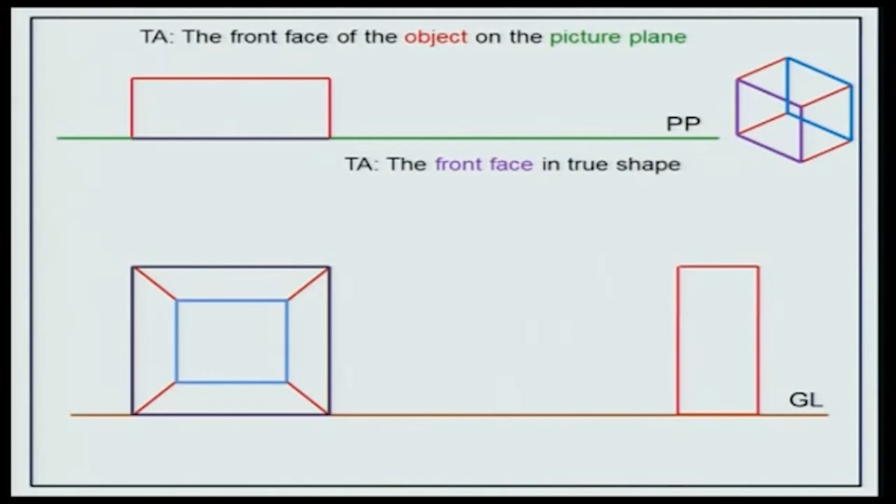This face is the back face. What do you have to say about this face? Is it going to be in true shape? Careful. Yes. Good. Is it going to be in true size? No. Good. The back face is going to be in true shape, but it's going to be scaled. Why? Because all the edges of the back face are parallel to the picture plane, but not on the picture plane. That's the reason why it's going to be in true shape, yet not in true size.

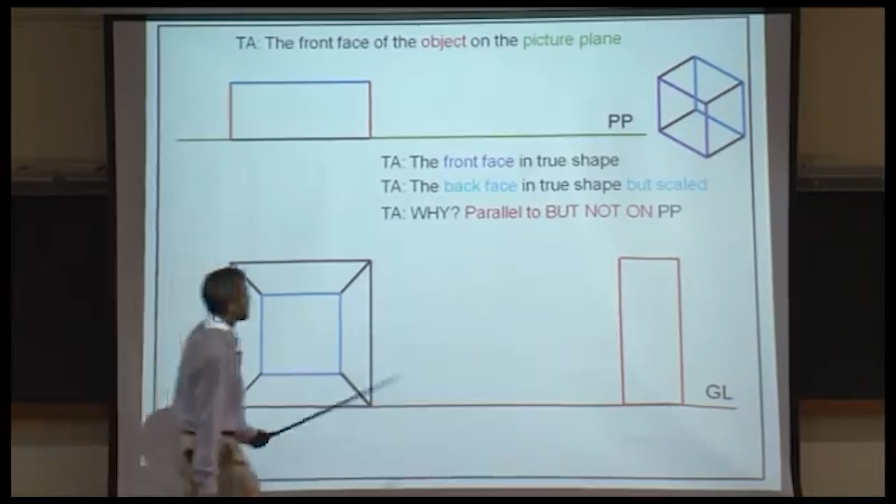This is the back face of the object. How about these edges here, the 4 ones? What do you have to say about this? Are they converging to a point? Okay. And they correspond to those depth edges of the object. Those black ones.

What do you observe about these edges? Are they on the picture plane? Are they running away from the picture plane? If they are running away from the picture plane, in perspective they're going to be showing up as a set of lines which are converging to a point. These black lines correspond to these depth edges of the object, and one observation that you make is the depth lines have to recede to a vanishing point.

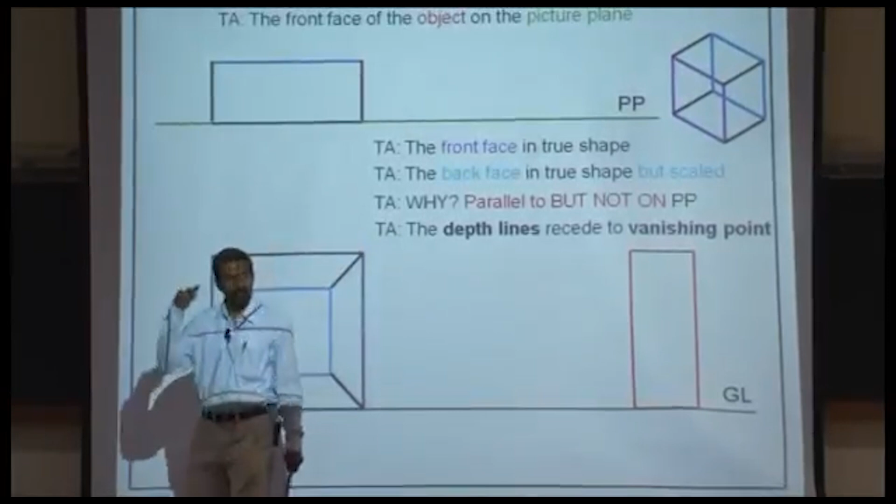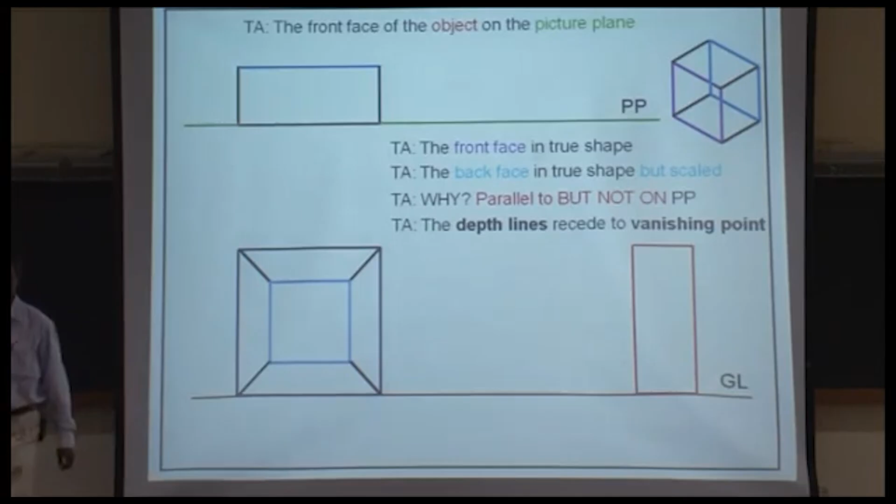So observations, let me repeat. The front face, of course, is in true shape. So anything of the object which is on the picture plane is going to be in true shape and in true size. By the way, what would this picture correspond to? Any idea? The scheme is very similar to orthographic views. You have a front view, a top view, a profile view, right? But what would this guy correspond to?

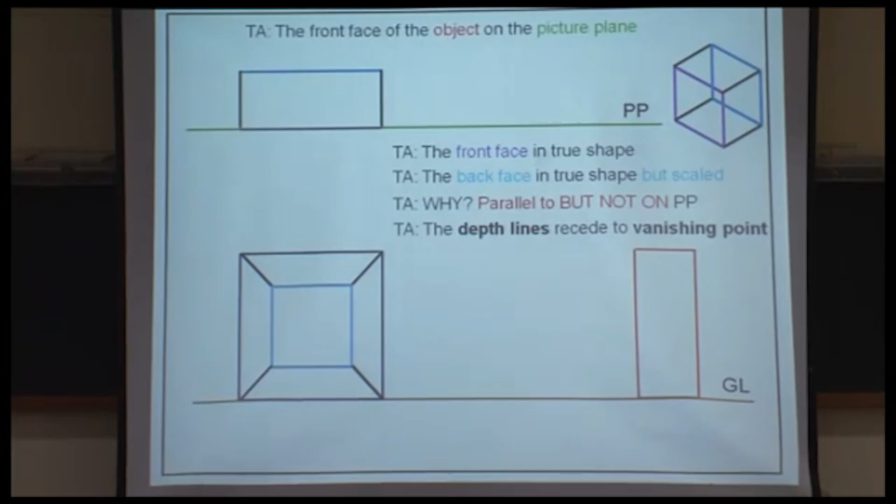This guy is going to correspond to the image of the object on the picture plane in the front view, of course. So that's the picture plane. This is the object stationed relative to the picture plane. So you'll see some image of the object, and if you rotate this thing, this is what you're going to be seeing. So keep that in mind. So of course these guys are converging to a single point. It's called the vanishing point.

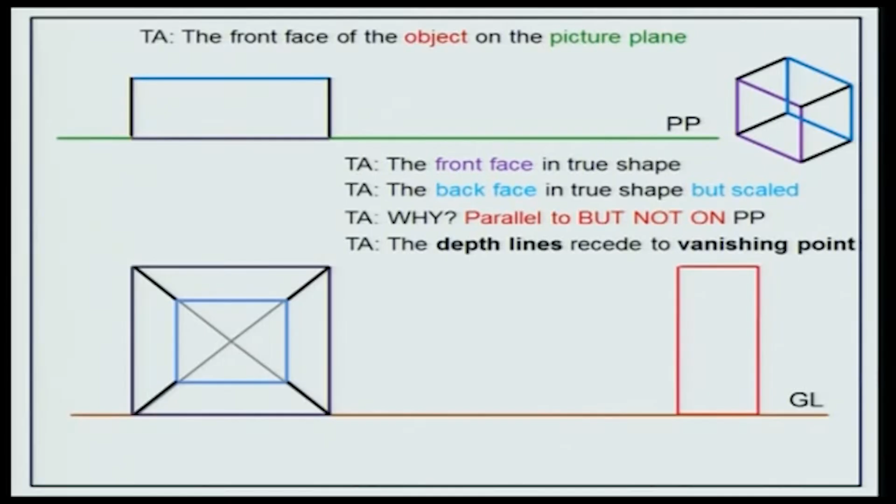And then based on these observations, we kind of frame a set of rules. So thanks to my conversation with Professor Kishore, he had dropped by my office, I guess 2 or 3 days ago, Professor Kishore, was it? 2 or 3 days ago, na? And then we had this little discussion from where I kind of summarized these rules for you.

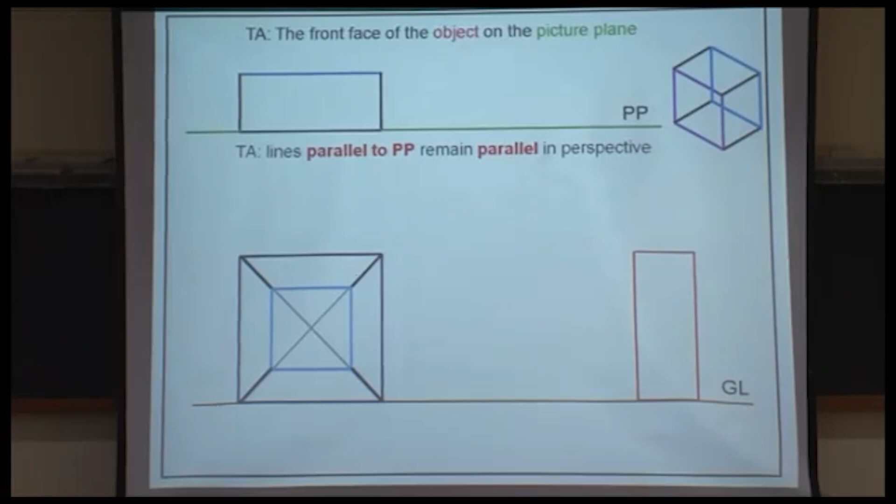Lines on the picture plane will always remain in true scale. Okay. Rule number 2. Rule number 3, any line not parallel to the picture plane has to recede to a vanishing point. Okay. All right, so these are 3 rules that you need to keep in mind. As I said, this guy here is the image of the object on the picture plane in front view. Okay.

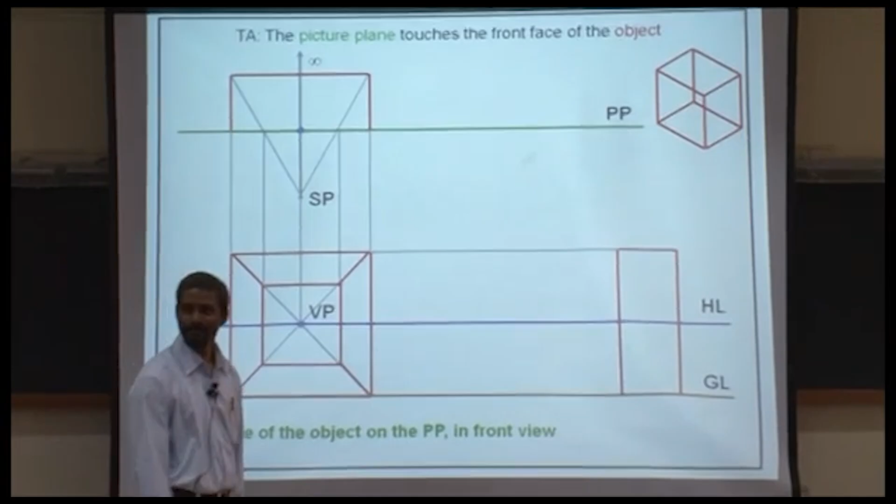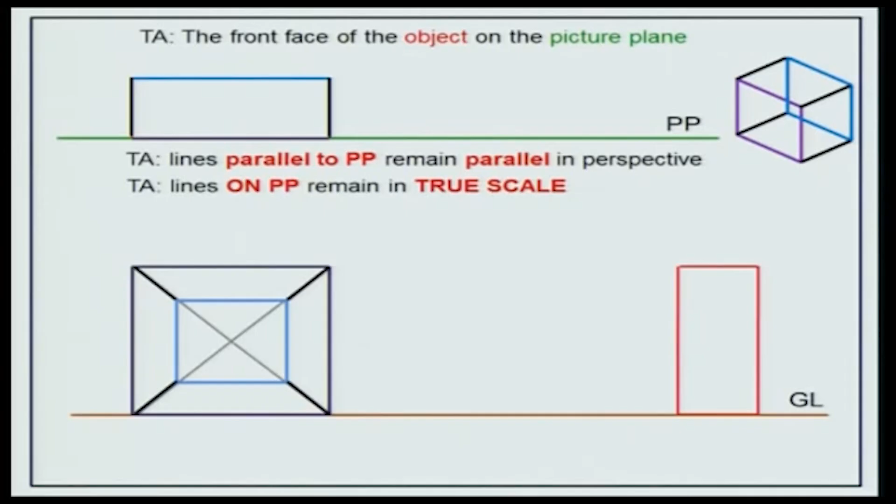Deep stuff? Yes, no? One more time, real quick. Keep these three rules in mind. Lines which are parallel to the projection plane or the picture plane, they remain parallel in perspective. Okay? Lines on picture plane, they'll remain in true scale. Any line which is not parallel to the picture plane has to vanish to a point.

Now look at the top view. How many lines do you think are not parallel to picture plane? 4. They'll all have to vanish, right? They'll all have to vanish to a single point or to 2 points. Single point? Why not 2? Why not 3? Why not 4? Huh? Why not 2? Why not 3? Why not 4? We'll come to that question later.

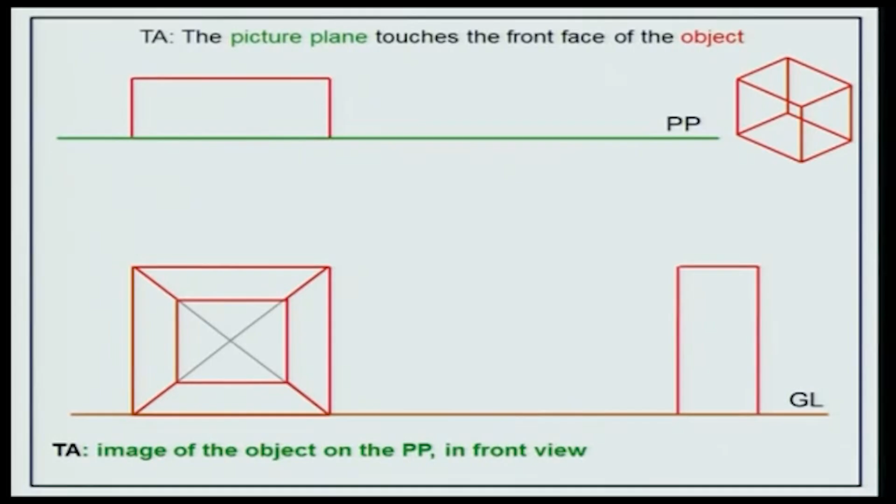The image of the object is on the picture plane, front view. That's the vanishing point. Horizon line. Look at this face. This face is going to be in true shape. You can get this face directly by projecting features from the top view and the profile view. Look at the back face. The back face is going to be the image of this edge in top view. How do you get this edge? You have to have a station point for that. Okay? To get the station point, project these guys back.

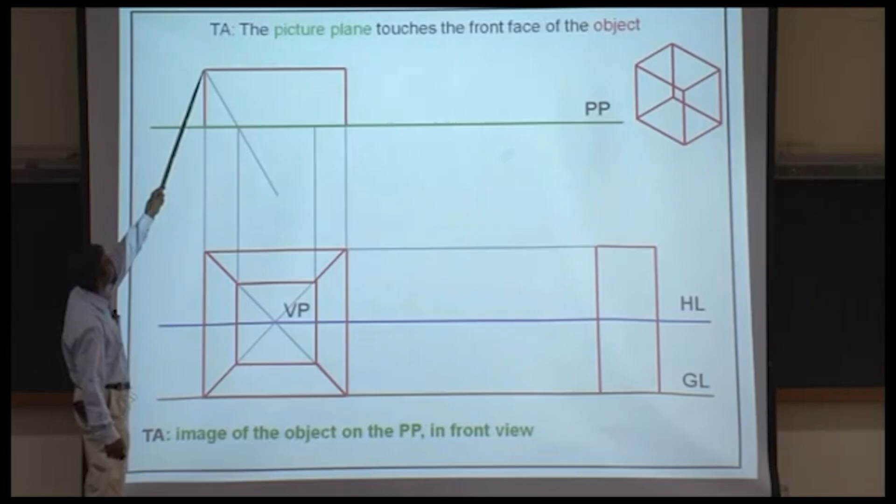Remember, we are solving this example backwards. Project this guy back. Okay? So this point here is the image of this vertex. This point here is the image of this vertex. This point is the image of this vertex. Join these two guys. The intersection of these two guys would be the station point. Okay?

And if you look along the depth direction, there's only one depth direction here. Okay? If you look along the depth direction towards infinity, look at the object. The image of that object on the picture plane will be a point. And if you project that point back to the horizon line, you'll be getting the vanishing point. So all these guys are related to each other. Okay? All right?

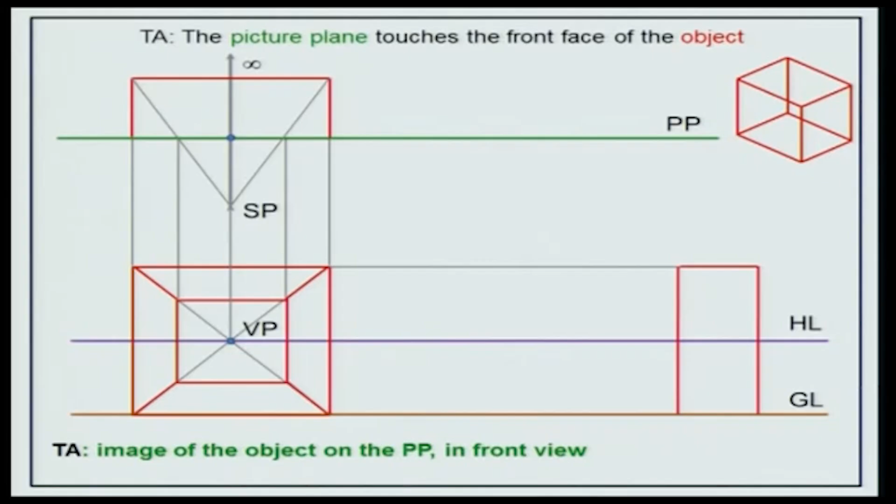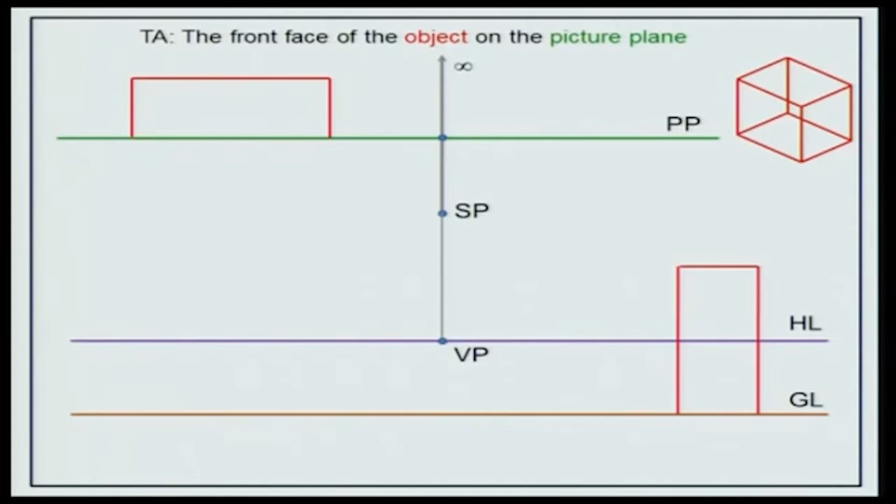We have a station point. First, let's get the vanishing point. Look in the depth direction, which is a single depth direction. Look at an object at infinity. The image of that object will be a point on the picture plane. Project that point downwards to the horizon line. This is your vanishing point. Once you have this vanishing point, of course, the front face of the object is on the picture plane. Okay? Get the true shape from the profile as well as top view.

Okay? And then from here to here, the edge is going to be vanishing where? Yeah? From here to here, the edge is going to be vanishing like so. And how about the bottom edges? The bottom of this is going to be vanishing like so, and this one is going to be vanishing like so. Okay? So you have to figure out these edges in the front view.

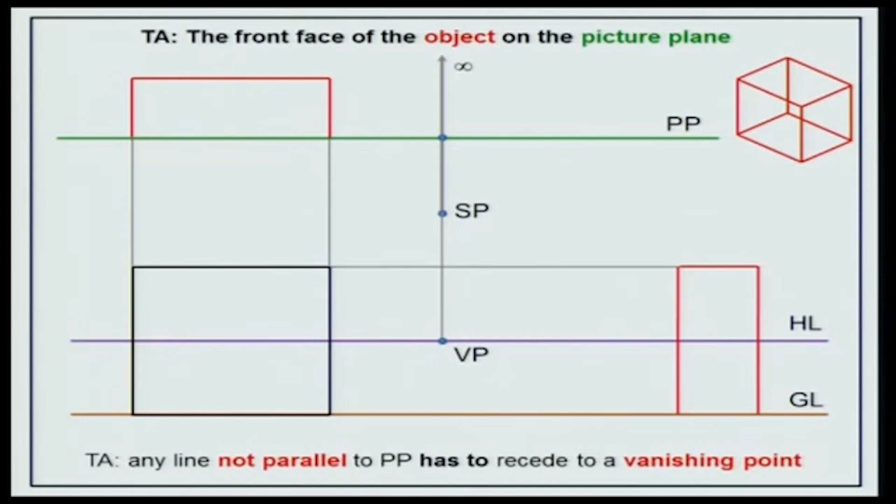And remember this rule: any line which is not parallel to the picture plane has to recede to a vanishing point. One. This edge is what? The top edge. This guy here. Yeah? How about this edge? This guy? How about this one? And finally, this one. Right?

Let's get the back face. For that, we need the top view. Look at the back face from the station point. Okay, so the back face is essentially an edge in top view. What's the corresponding image of the back face? It's going to be this line. Project this guy downwards.

Okay, and the intersection of this line and this line will give you one vertex. This line and this line will give you the second one. This line and this one, the third one, and I need to project this thing back over here. So this will be my fourth one. Okay, so the first edge, the second one. Okay, and would this be a partial edge or a total edge? And then I get the depth edges. Done?

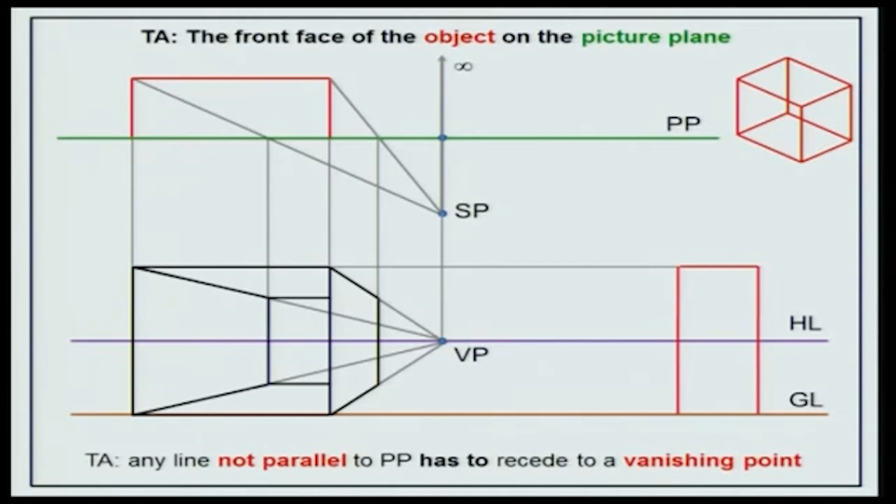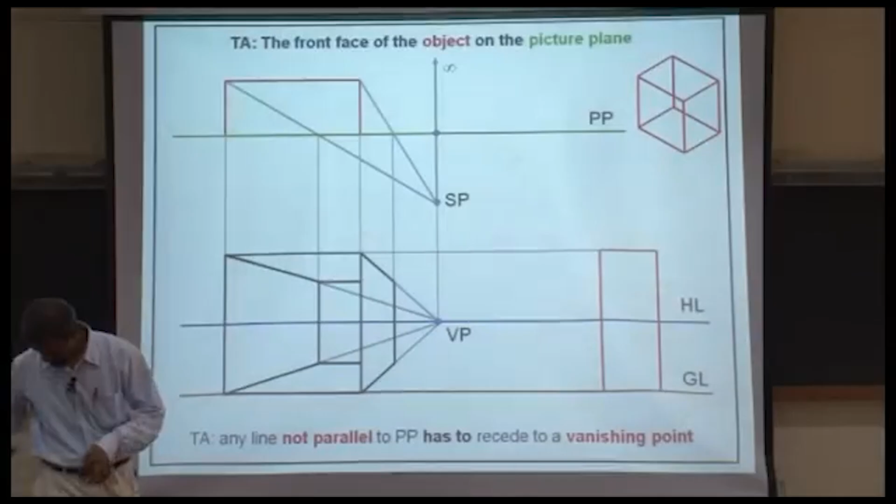Done? Now just imagine if you just let go of these projection lines, how the perspective is going to look. Yeah? With me? Any questions so far? Bhardwaj? Hear me? Any questions so far? Yeah? Can you explain what is HL, GL and this PP by showing the example of that hollow view? Like when I am looking at it, what exactly is represented by all this? So like physical thinking when I am looking at it.

Come over here. Turn around. Sir? Turn around. Flat around or this? What do you want to know? So like what is this HL, GL and PP when I am looking at that hollow box? Stand here. Turn around. Face the class. Okay. I need a person taller than him. Take your slippers off. Okay. You just face the class.

All right. So he is the station point. Ayush Shekhri. Okay. Of course, he has a top view and a front view.

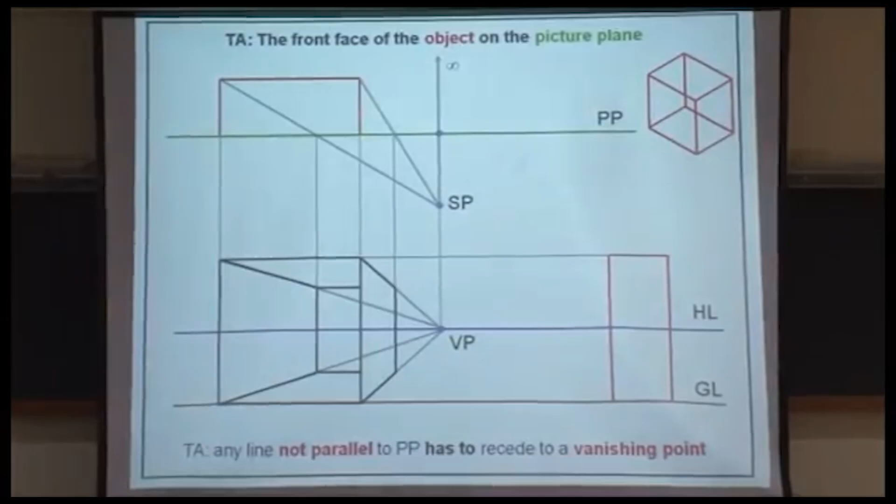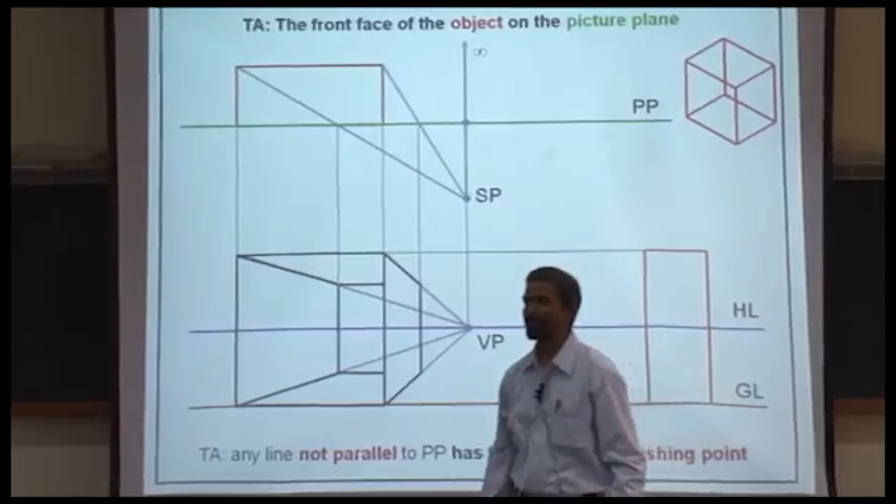So before that, the picture plane would be just kind of coinciding with the column, okay? It's just going to be attached to the column. The front face of the column is the picture plane. Okay, so this point, which is what? The image of the object which is far away along this direction on the picture plane. Aditya, the top view guy, will be able to see that. And if I project this thing back onto your horizon line, which is your eyesight, this is where the vanishing point is going to be. Okay?

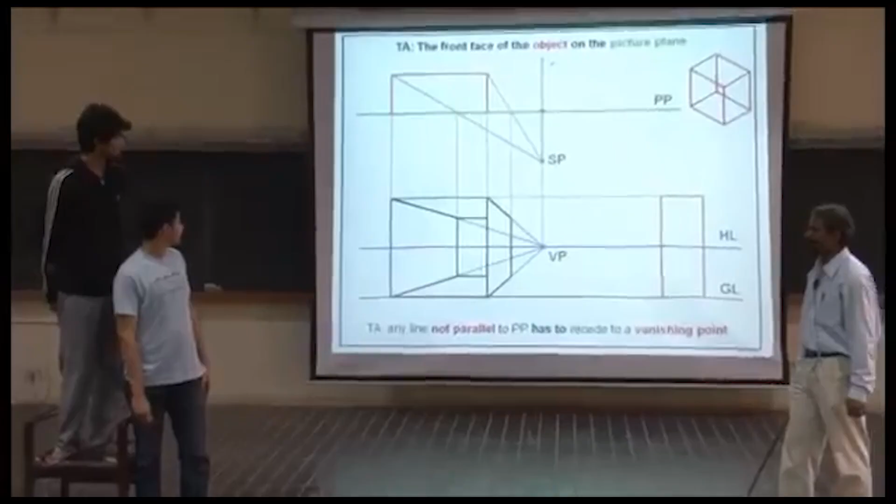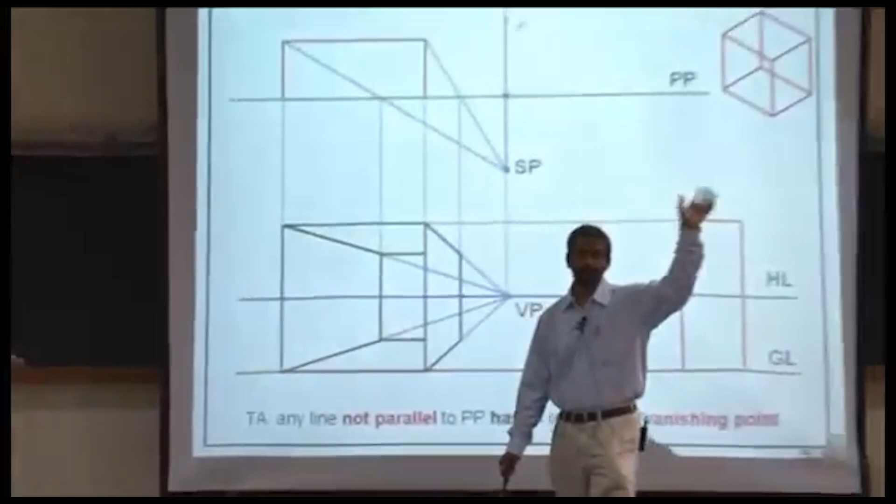Your ground line? Yeah, down below. So that's what his ground line is. And what else do you want to know? Did you get it? I am assuming that my height is 0 when I am looking at that object. No. In the top view, you have no height. So, guys, this entire thing is in the top view. So it's pretty much like orthographic projections happening. Just that you're recording the image of this object on this picture plane and you're projecting this image over here. That would be your perspective.

So then, sir, when I'm looking at that object, how is my horizon line behind? No, this is the story in the front view. Ground line, horizon line, aren't all of these lines with respect to bird's eye view? In top, yes. But not in the front view. In the front view, you are the boss. In the top view, he is the boss. So remember that this is a story of two views interacting with each other. Station point upwards is the top view. Station point below, vanishing point, horizon line, ground line, they all form a part of the front view. Got it?

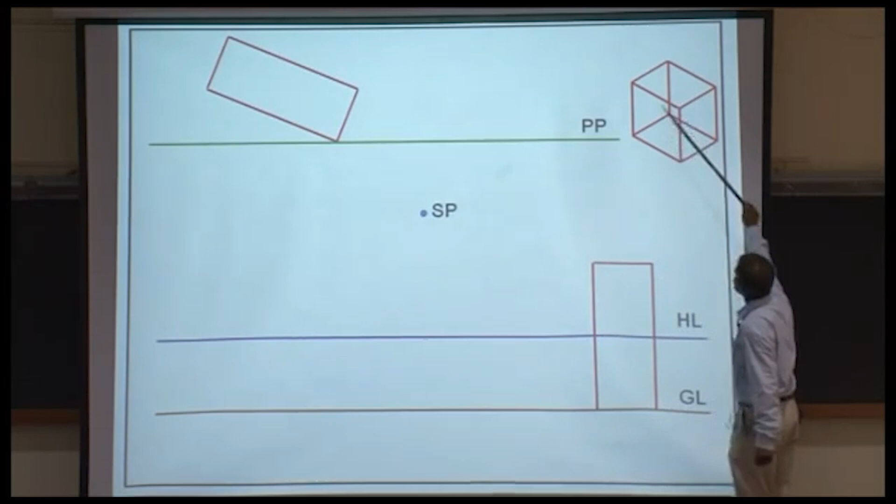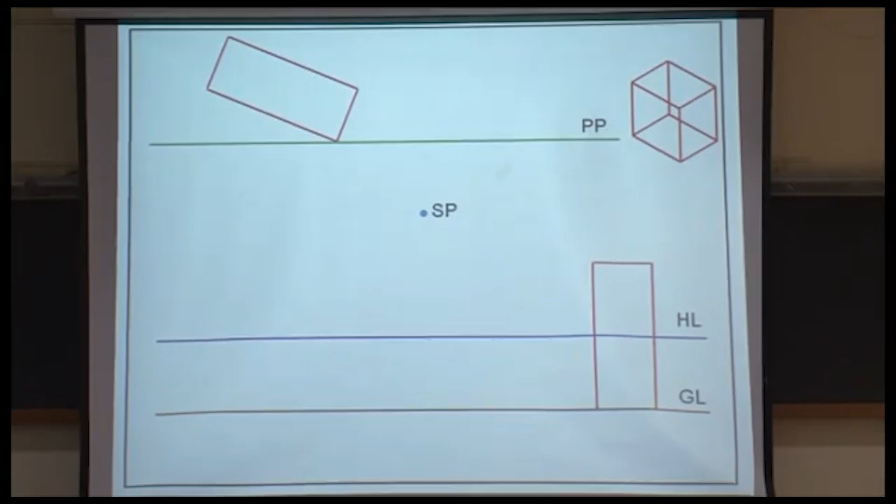2-point perspective. Same story. Look at the same example. I'm going to be making a slight change in that example. Instead of having this face of the object on the picture plane, I rotate the object in the top view so that I have only a single edge on the picture plane. Now stay with me here. It's going to be important. It's not the front face, but the front edge of the object that's on the picture plane. Okay?

And remember this line below. Any line which is not parallel to the picture plane has to recede to a vanishing point. How many lines do you see are not parallel to the picture plane? Careful. Careful.

How many lines are not parallel to the picture plane? 8 are not parallel to the picture plane. 2, 4, 6, 8. All the edges which are going into the screen corresponding to these 4 vertices, they will remain or they will stay parallel to the picture plane. Okay? Those which are parallel to the picture plane will remain parallel in perspective.

Those which are not parallel to the picture plane have to recede to a vanishing point. Once again, any line which is not parallel to the picture plane has to recede to a vanishing point. Stay with me here. Now look at the object. Look at the pair of lines. How many vanishing points do you think you'll have? 2.

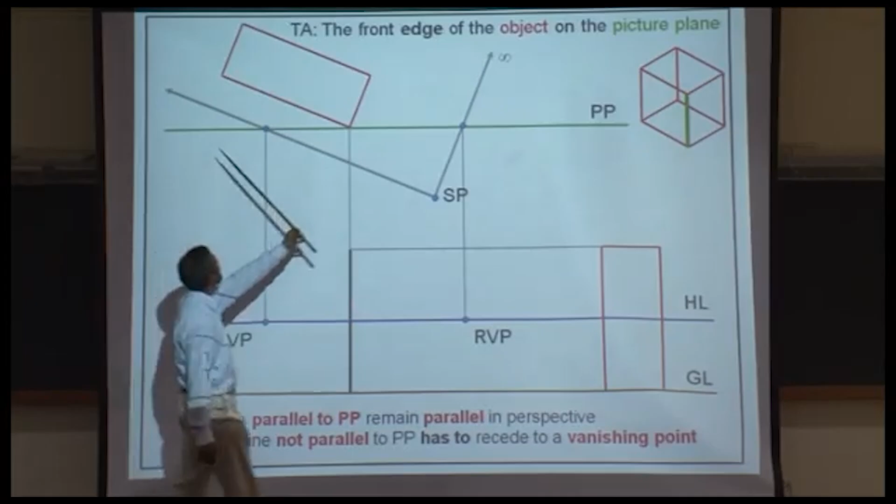Now focus on this vertex and focus on the corresponding edge. What do you have to say about that? It's going to be in true length. You'll get the true length from the profile view. This is what the edge is going to look like. All the other 8 edges which are not on the picture plane, they will vanish towards the respective vanishing points. So these edges, where will they vanish? Right or left? Right. Correct. And these edges, they'll vanish to the left.

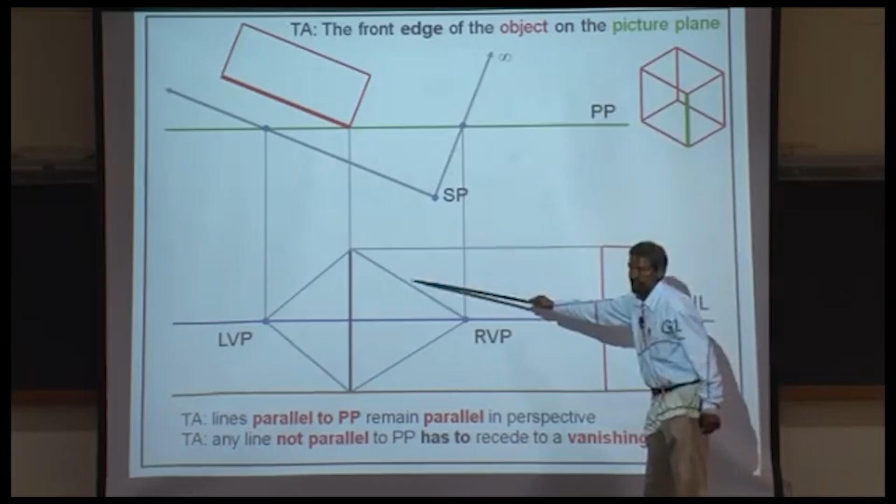Okay, so let's focus on this edge, which is this one, and the edge below this. They both will vanish at RVP. This thick edge and the other one will vanish at the left vanishing point. So what do you have? You have this edge in perspective, this edge in perspective, this edge in perspective here, and this edge in perspective here.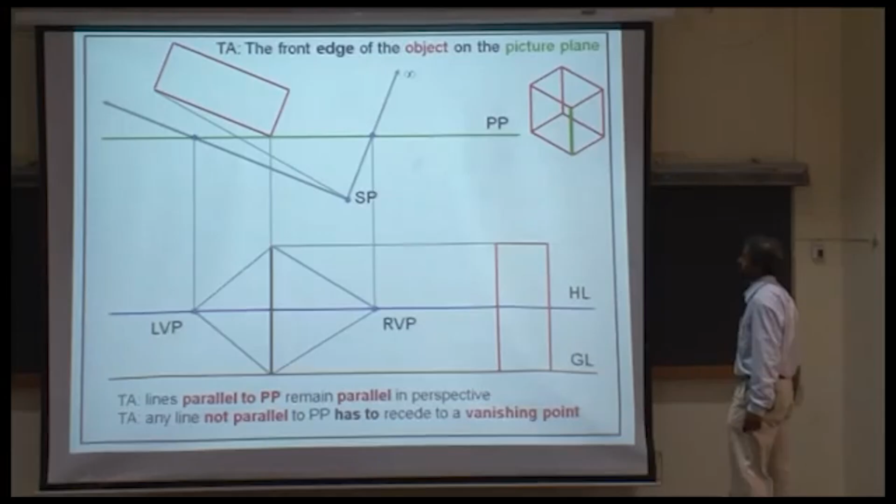What is left? What is left? This vertex is going to be where? On this edge? Yeah? Okay. And this vertex is going to be on this edge as well as on this edge. 2 vertices, one below the other.

Again, if Ayush looks at this vertex from the station point in top view, this is how he would be seeing the image of that edge on the picture plane. If you project that image down, you'll have this edge and you'll have this edge. All right. How about this guy? Will it be visible or will it not be visible? It will not be visible, all right.

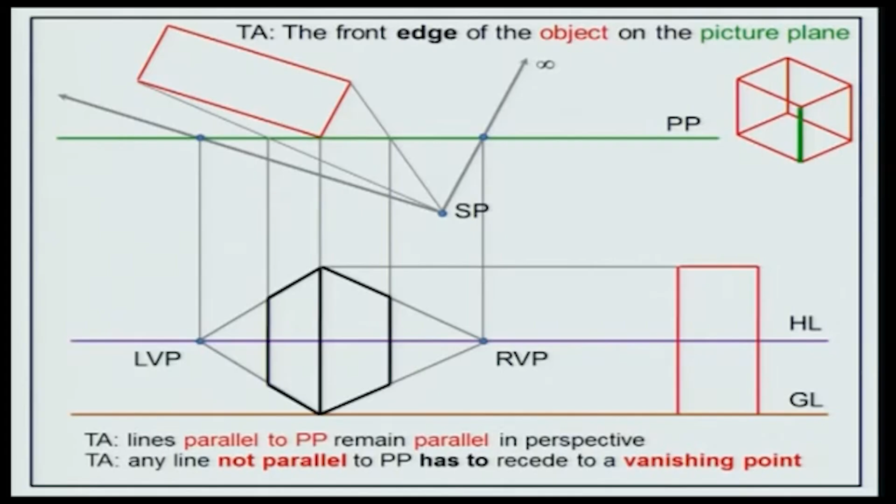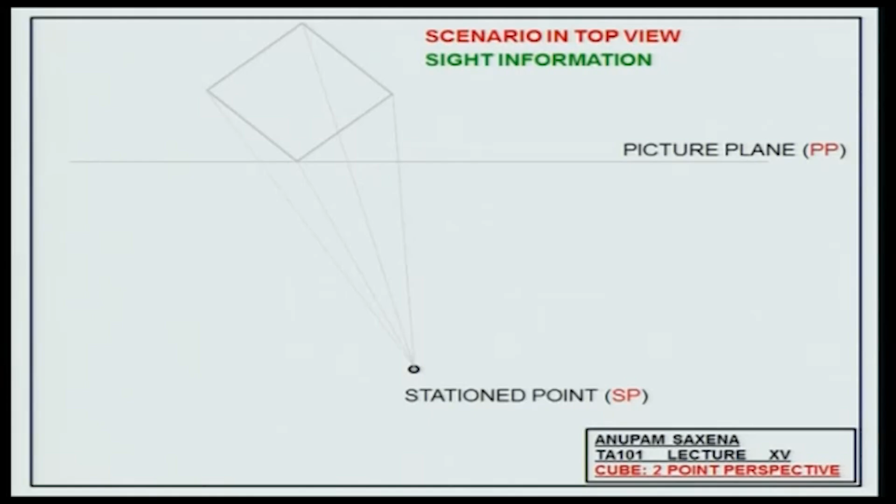Again, to emphasize, we are combining two scenarios, one the top view, the other one the front view. This is a slightly different example. The station point is at a different position. You get the sight information, essentially these rays intersecting with the picture plane in the top view, and then you get the height information from the front view. You have the ground line, you have the horizon line, you have the station point. All right, so you get the height information from here.

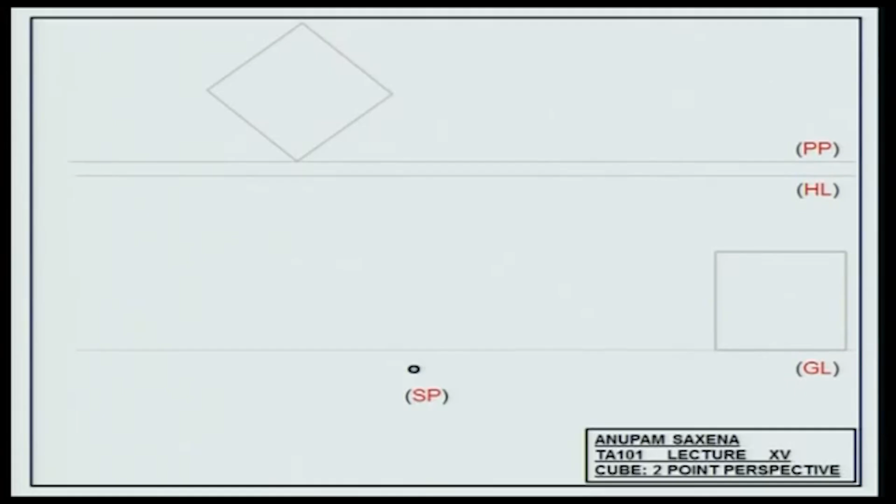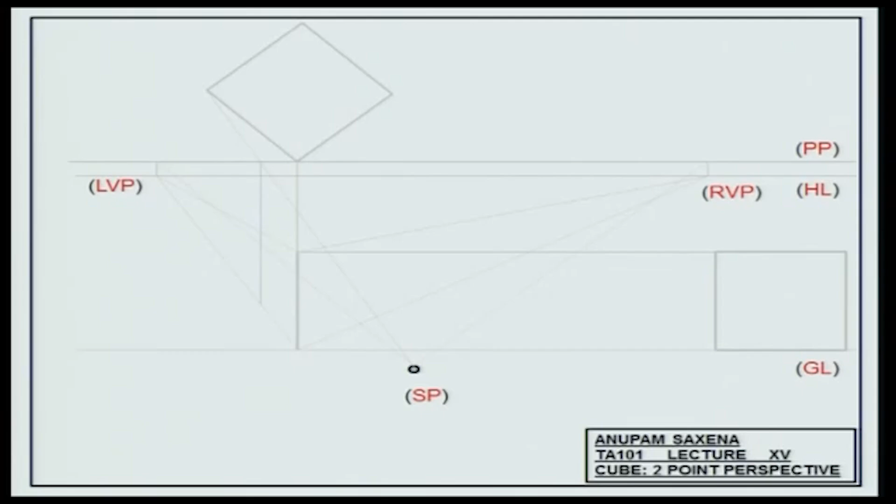Okay, so if the technique is clear to you, I'll not say anything from now on, just observe. This is what? Left vanishing point, right vanishing point, true height. The edges which are not parallel to the picture plane, they vanish. You take the projections from different vertices or different points in the top view and get the perspective really nicely.

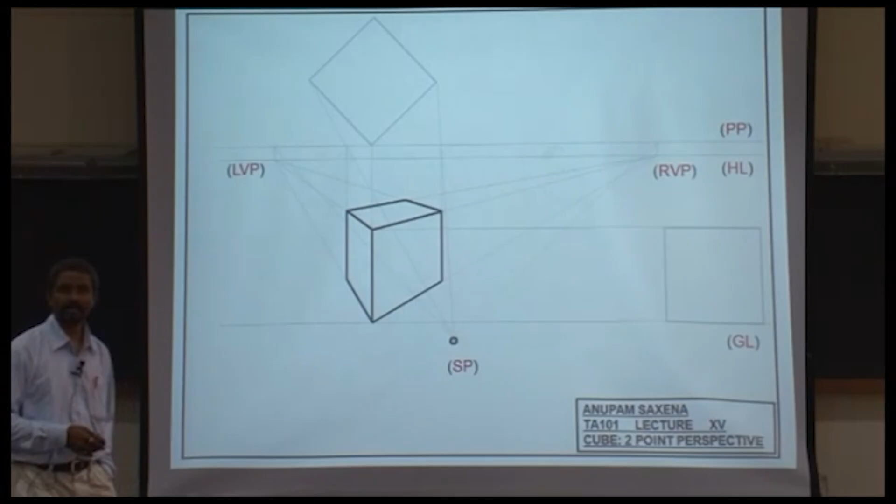So remember, it all depends on where you're stationed. For you, the perspective is going to be different. For you, the perspective is going to be different. So it all depends on how you are stationed with respect to the object as well as the picture plane.

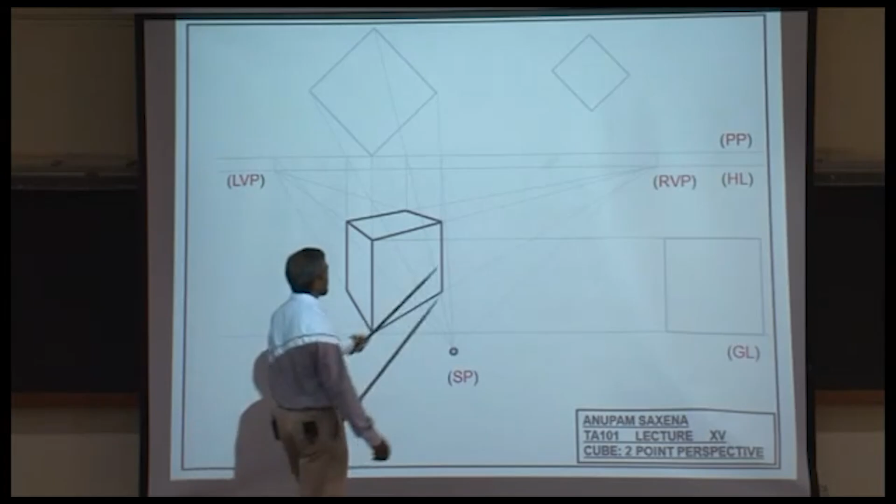Something important. If one of your edges or if the object is not on the picture plane, then what? If the object or any part of the object is not on the picture plane, what do you do in this case? How do you get the true height? Let's say, how do you get the true height of this edge, which is passing through this vertex and into the screen? Kananu? No idea?

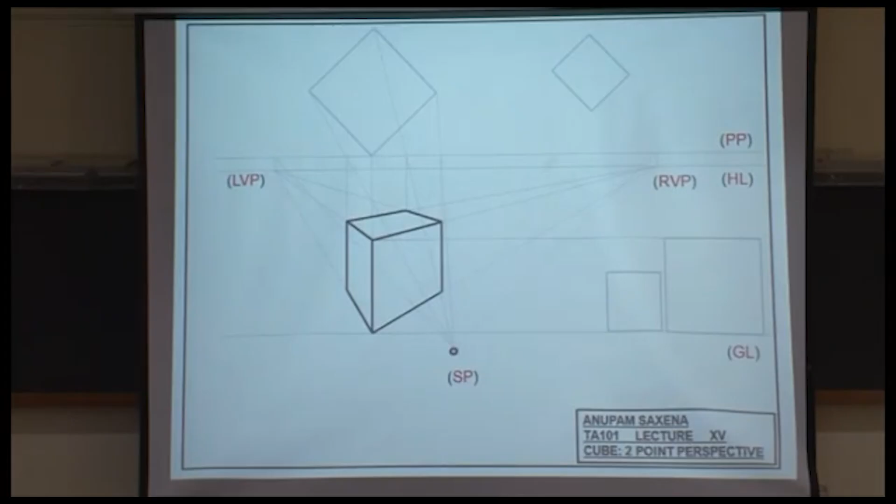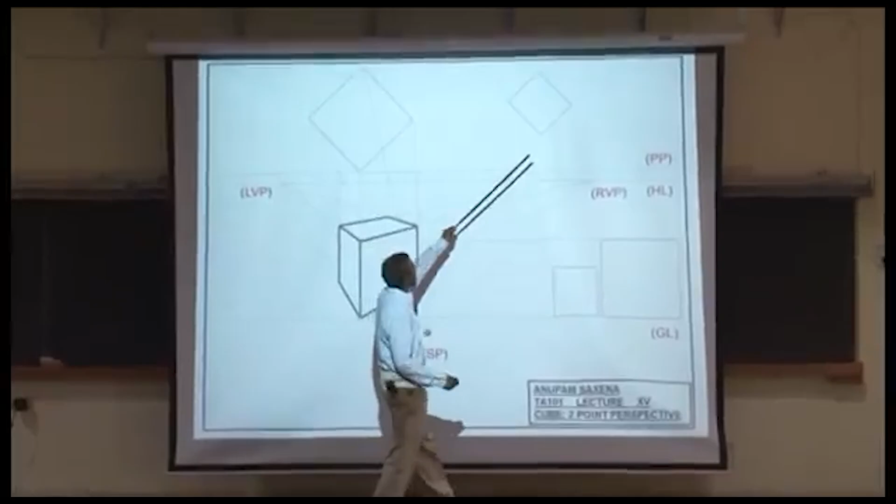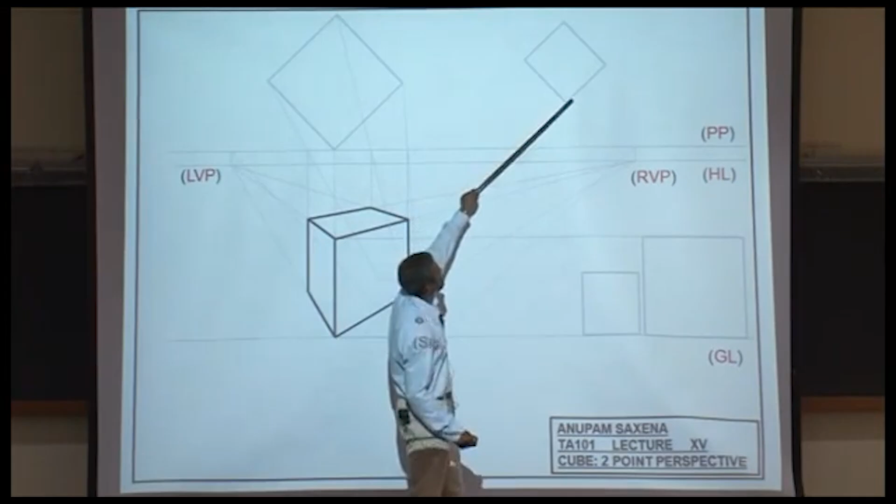Okay. One option, of course, is to extend one of the edges. Extend this guy and imagine that this edge over here has moved along this edge. Okay, here. Now, if this edge has moved along this edge, which is now on the picture plane, you can get the true length of that edge, right? So this would be in true length.

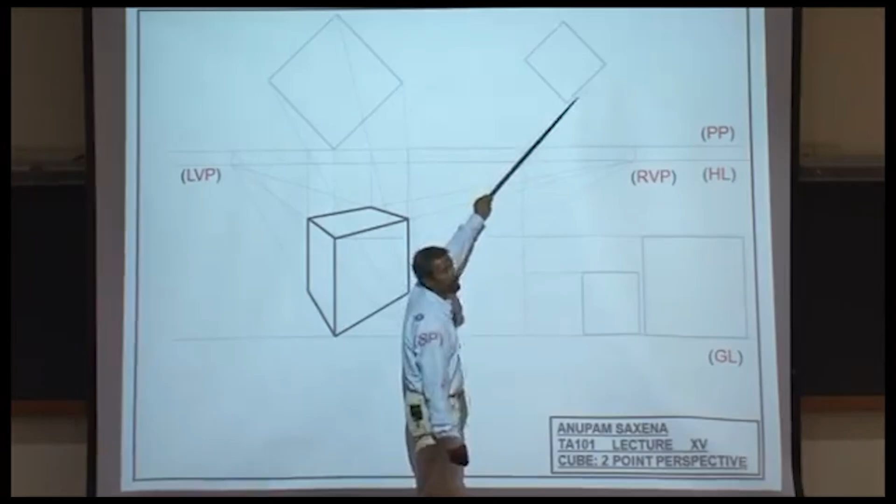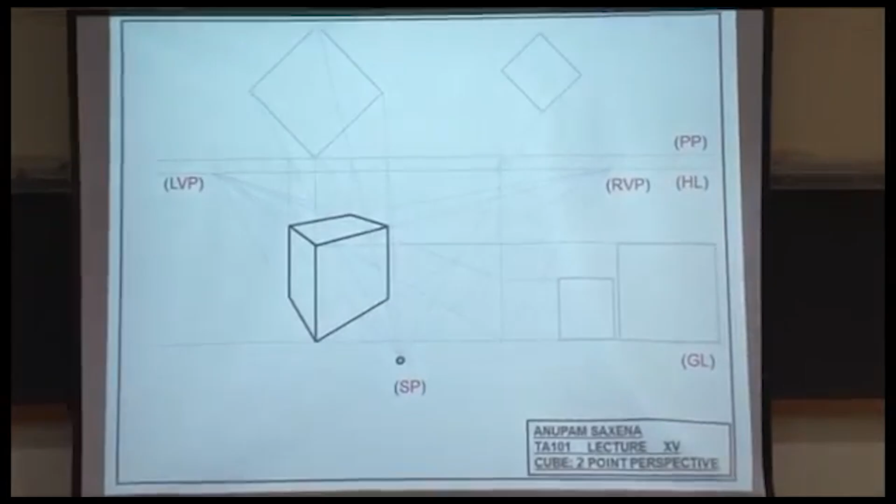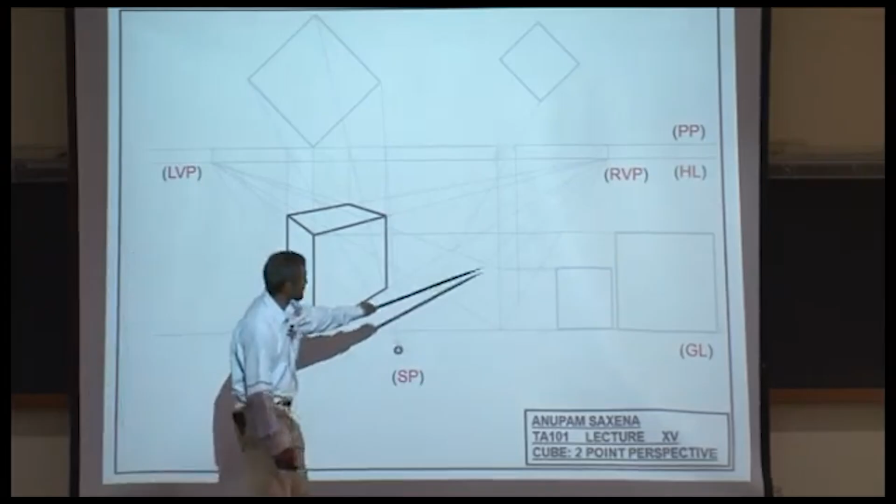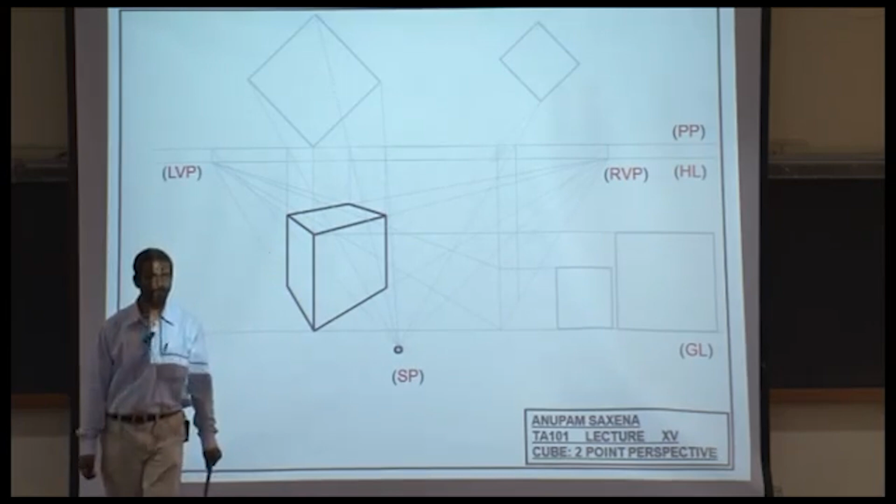Now, you would know that this guy is going to be vanishing. Now, along where? RVP? Yeah? Okay. You go to your station point. Of course, you are at the station point. You look at this edge now here. You look at this guy here. The image of this point on the picture plane is this, projected downwards. So this edge, which is here, will be in true length, but this edge here will show up like this. Yeah? Okay? One more time.

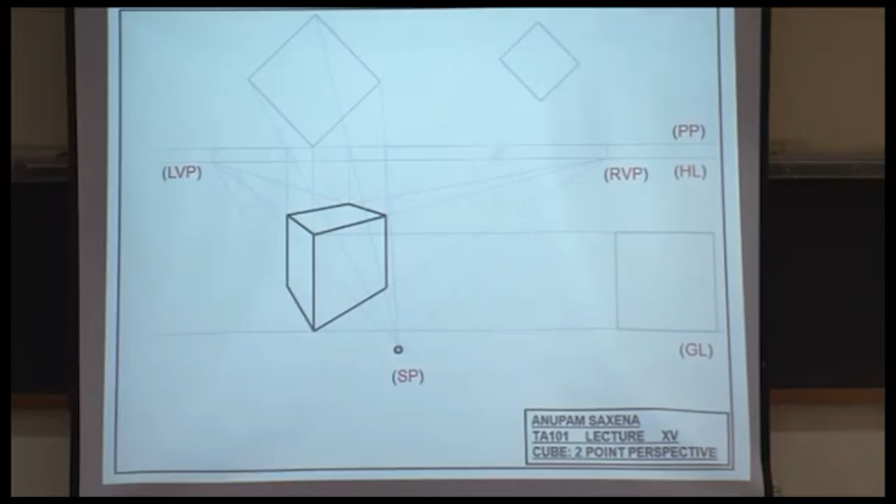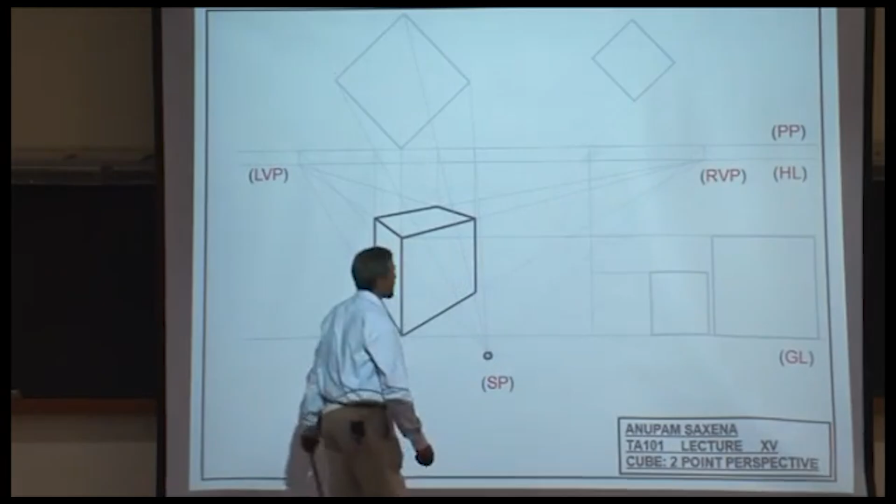Okay, stay with me. So if any feature of the object is not on the picture plane, use the extension, get a feature of the object on the picture plane. So just imagine that this edge extends. This edge would vanish towards RVP, the right vanishing point. This edge will vanish towards the left vanishing point.

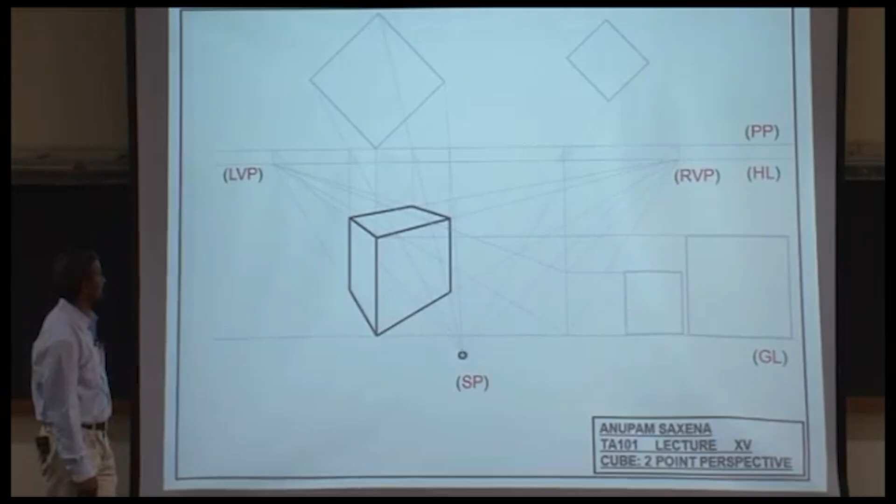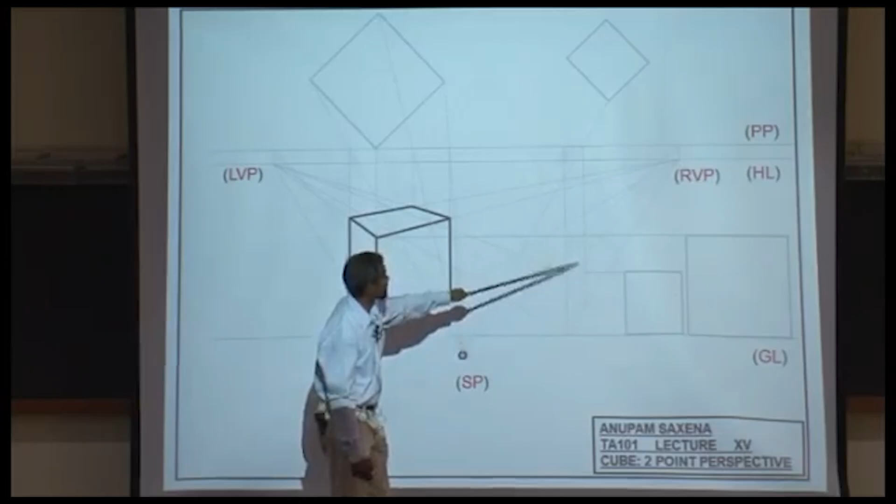And if you draw the line of sight from the station point and look at this vertex here, the image of this vertex on the picture plane will be this point. Project that point in the front view, and this would be the perspective image of this edge. That is something that you need to keep in mind. Rest should not be very difficult. Should be straightforward. Just follow those three rules and you should be able to draw a nice perspective.

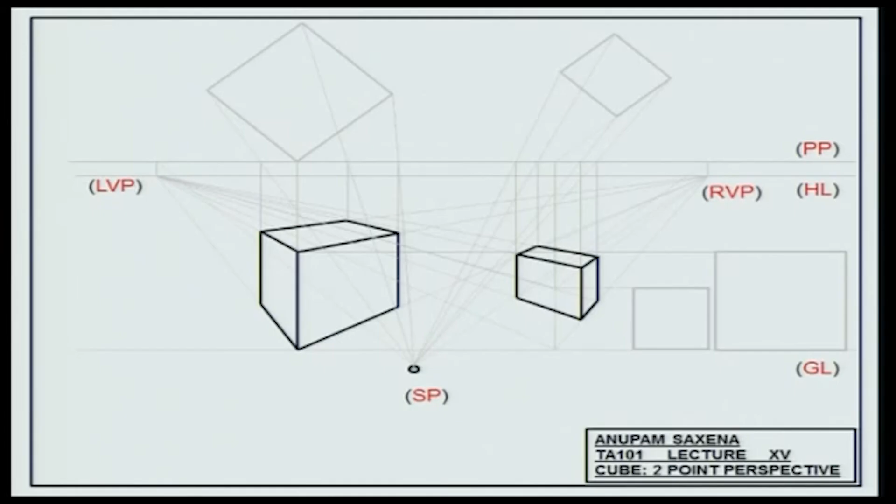Now just imagine the cube on the left of the station point and the cube on the right of the station point. Differentiate the perspective images of these two cubes. Okay, so they'll be different. Just an example. I think this is going to be an animation. Yeah, this is going to be an animation.

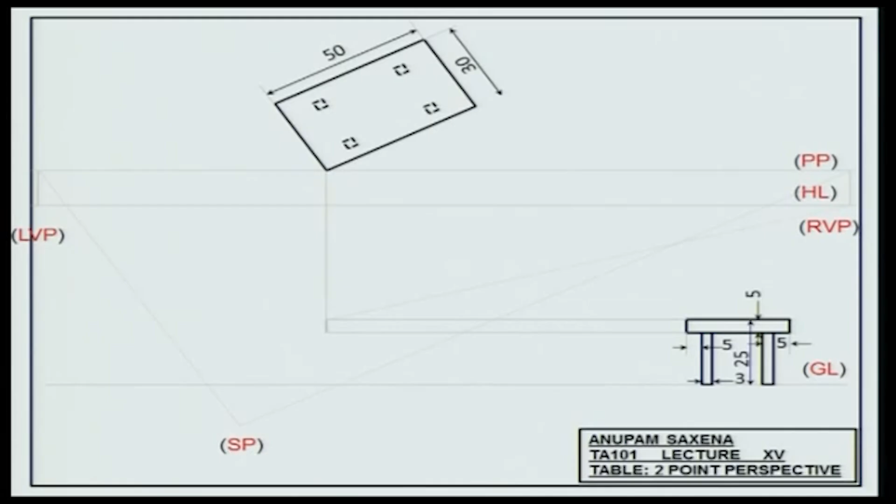Those who want to stay back, stay back. Those who want to. Just watch. Huh? Well, you wanted me to quit, no? Yeah, you have the slides also.

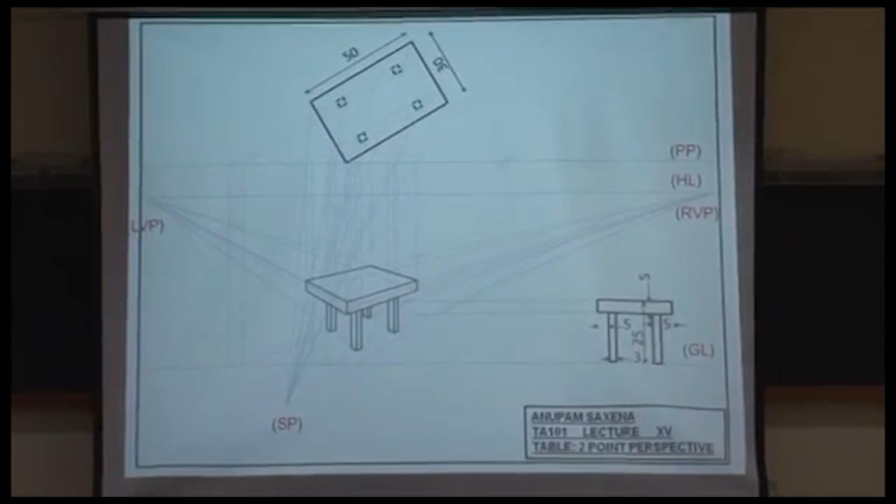Yeah, okay, fine. So just one point. You know, reminds me of one very nice story. I was

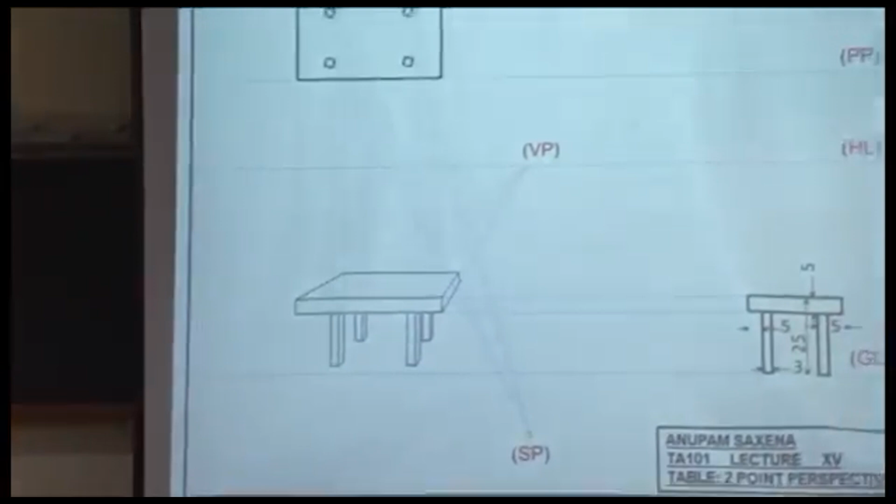One last point. I want you guys to appreciate the difference between this figure and this figure. Okay?